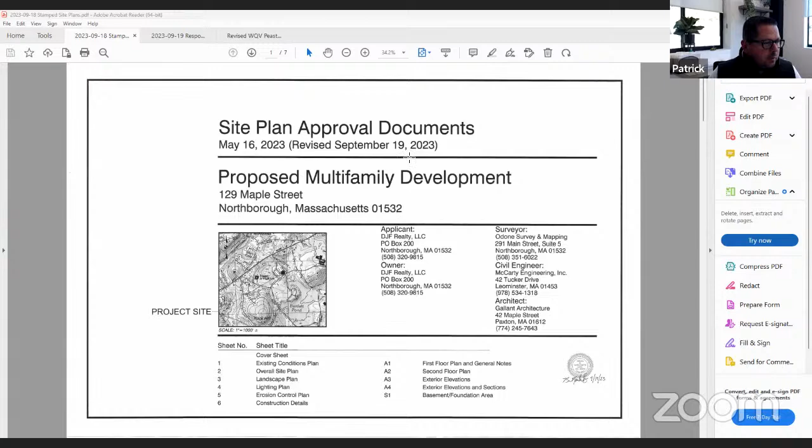So as you can see on the title block here, we started this back in May of this year. The revised plans are dated September 19th, 2023. The existing conditions plan has been updated to show it now as one parcel. If you need any further information on that, Dave can certainly fill you in on the discussions with the town, town council, building, and assessors. But now the site is bounded on Maple Street at the bottom of the page, Johnson Avenue on the left, Omaha Street on the right.

It shows the existing 2.5-story, 5-unit building that will be demolished, as it was destroyed by fire and is sitting there waiting for us to get through the approval so that we can demolish and move forward.

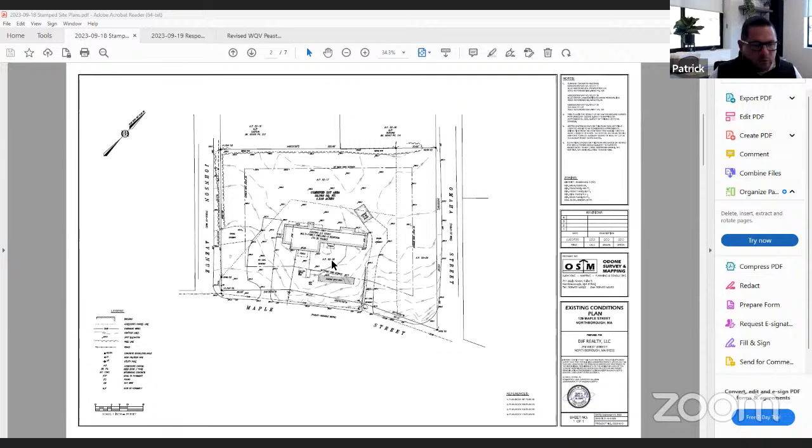The revised layout, Jay, correct me if I'm wrong, but the footprint remained the same for the proposed building. However, we did slide it further back and more centralized on the site. We initially had 2 parking fields. We now have 1 parking field with 1 curb cut off of Maple Street. A walk from the parking lot, we have a screened dumpster pad with a fence enclosure and then a sidewalk that leads to the front door of each of the units.

And then we have a back door off of each of the units that goes to a proposed patio. This represents underground stormwater improvements and underground electric. This is drainage along the front of the building, again going to an underground dry well.

And then your domestic and sprinkler water services coming in from Maple Street. The existing leach field is proposed to remain, with a new 1,500 gallon septic tank being added upstream of that. We also have a proposed bicycle rack here at the corner of the parking lot.

That's our overall site plan. Landscaping plan done by Larry Green, our in-house landscape architect. He's proposing trees here along Maple Street, smaller shrubs at the corner of the parking lot, another large tree, and then foundation plantings all along the building.

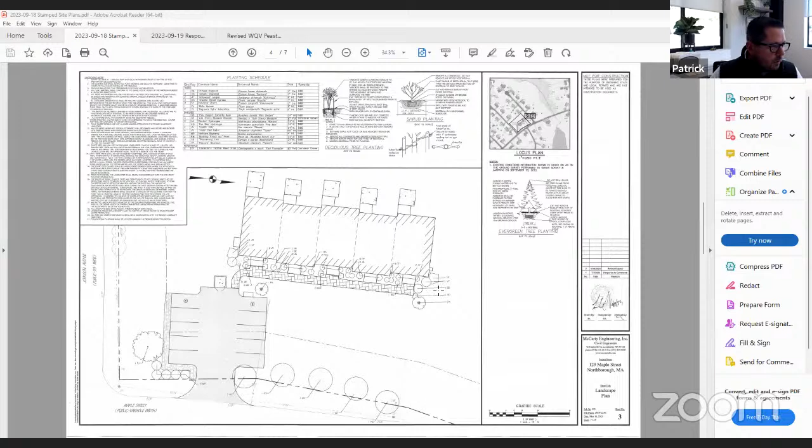If I zoom in, you can see the species he's proposing: single Chinese dogwood, two Satomi dogwoods—forgive me for butchering that, I'm not the landscape architect—some junipers, cypress, cherries, white spruce, and arborvitae for trees.

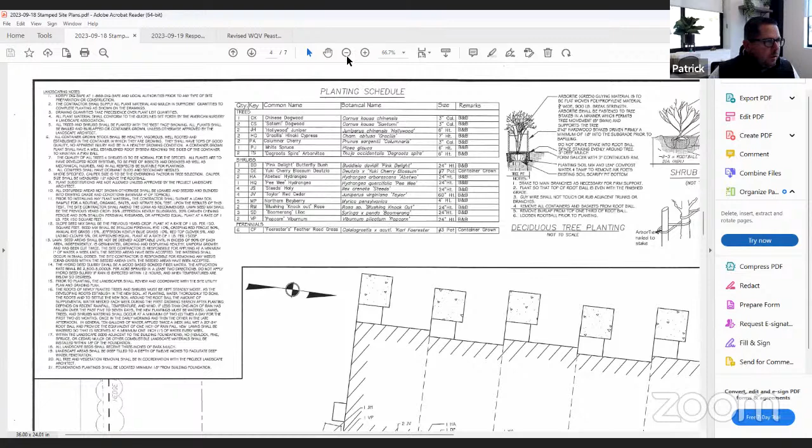So a total of 3, 5, 7, 9, 10, 12 new trees, and then a bunch of shrubs and some perennials, the shrubs being butterfly bushes and hydrangeas, some holly, bayberries, some knockout roses. So Lara, our in-house landscape architect, has put together a plan to beautify both along the street and along the front of the building.

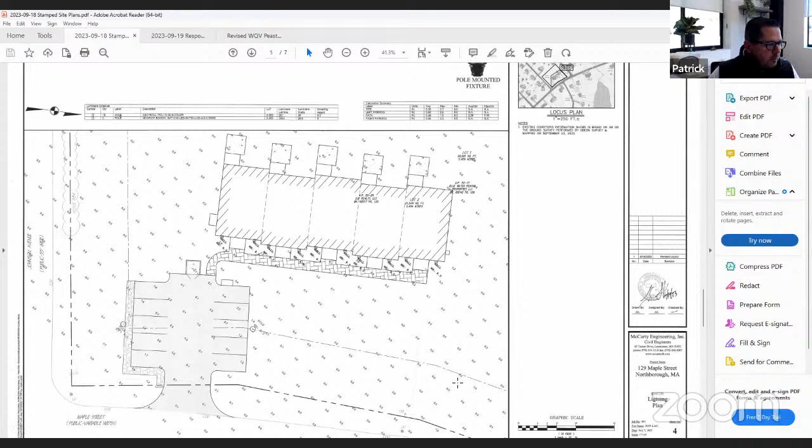Photometric plan—we just have some lighting at the front door of each unit and a couple lights at the parking area. These numbers indicate the foot candles, so you can see at both the street lines and the property lines there are zeros, which shows we don't have any light spillage off of our site onto the surrounding sites. And obviously those would be LED style fixtures.

This is our erosion control and construction staging plan, with some typical construction details of pavement and pea stone diaphragms, water mains, the bike rack—everything, so Dave and his team know how to put the project together.

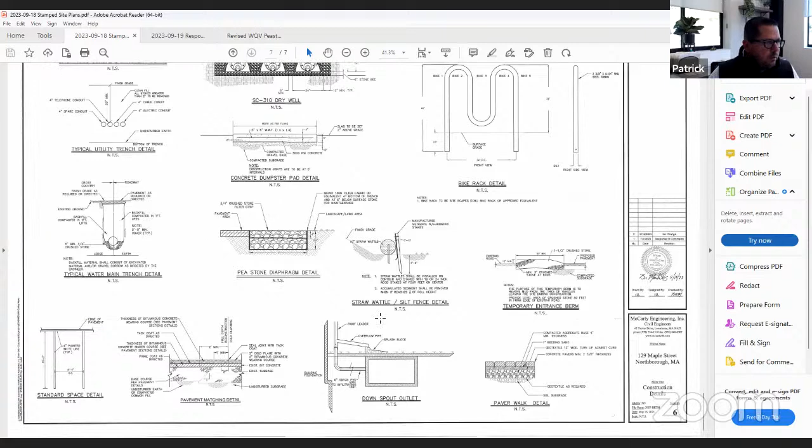So that's really the changes on the site plan perspective. Probably makes sense for me to stop sharing and let Jay share the architectural plans. Unless we want to pause.

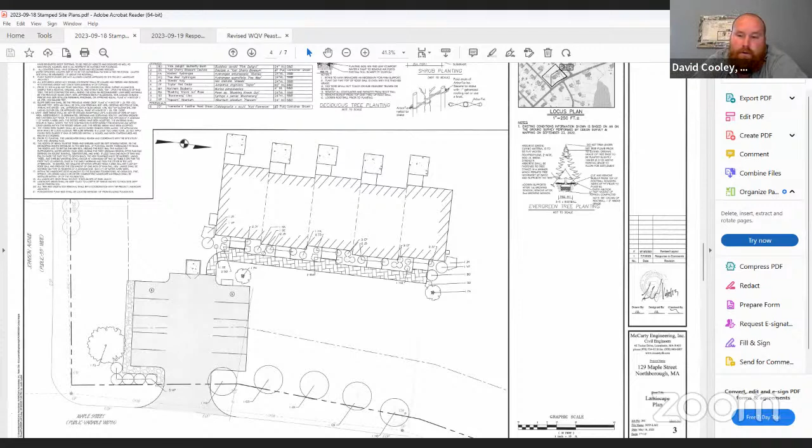Google had a pretty recent one, I can throw it up on the screen if you want. Some of it actually shows the landscaping that's there. Sure, do that, because our bylaw says if you have multifamily adjacent to single-family residential, there's supposed to be 25 feet in between, which you have. It also should be landscaped as a buffer, so.

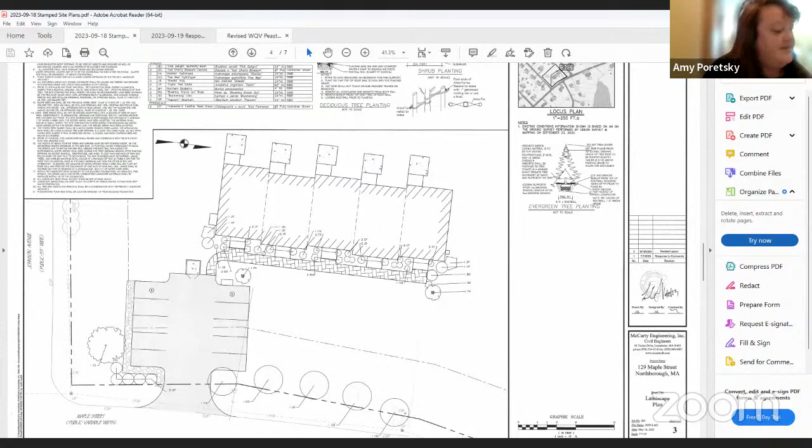I haven't, let's just switch to Google. That's probably the smartest thing to do. Just give me a sec.

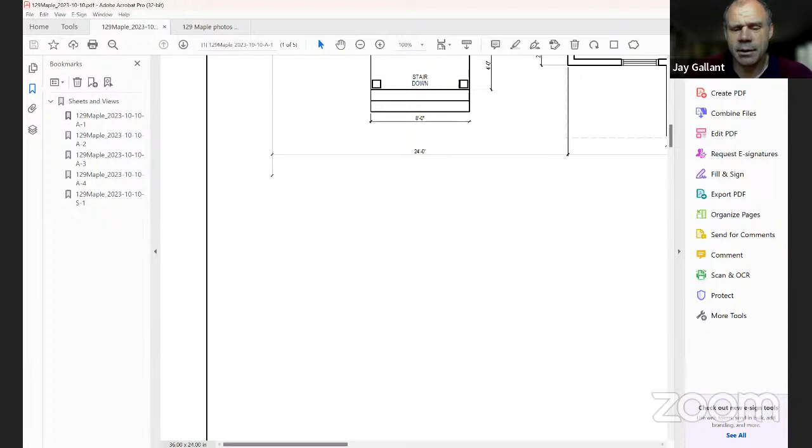So if I could switch quickly to the proposed. Here's a kind of listing, and then I'll switch to the elevation page with a little bit more information, but I put together a summary of the finishes that we're proposing.

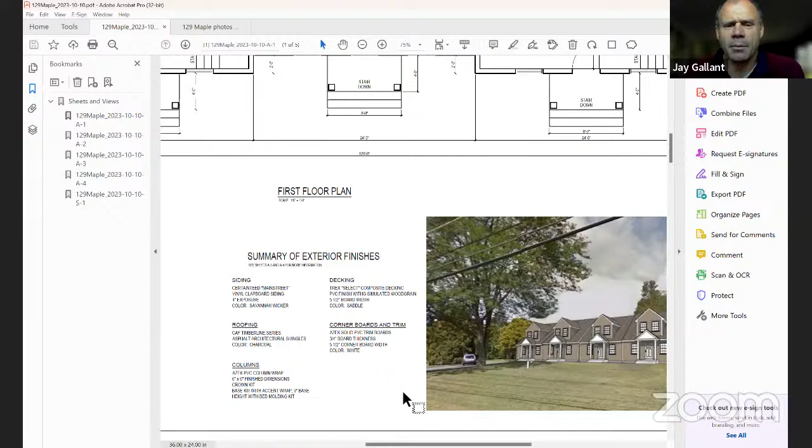The siding is a vinyl clapboard siding, 4-inch exposure, pretty standard, identical to the nearby buildings. Roofing is a standard architectural shingle, dark color, which will be a nice contrast. It'll look really sharp. The decking is composite, I'm thinking a brown to complement the tan, but that's certainly up for discussion.

And white trim and white columns with a little bit of detail just to give it some life. The one nice thing about the original building, obviously it's a shadow of its former self, but it was originally a pretty sharp looking building with some detail. We're trying to bring some of that back. It's going to be a nice building. We want to make it attractive.

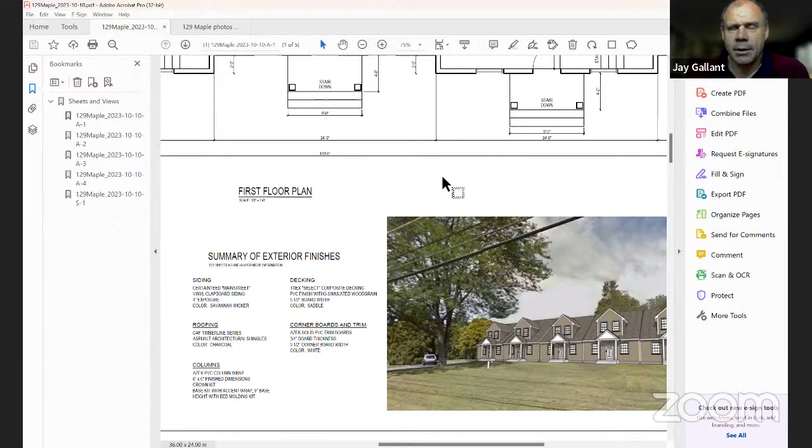On the exterior, the idea, as we talked about last time, is to essentially create 5 similar elements, but it's one building. That's one thing we need to stress with zoning -- it was a single 5-unit building before, and it will be a single 5-unit building again. It'll just have the appearance, since we're going to do 5 individual front doors. It's going to look a little different, but it's the same concept.

So here's the siding. I think the tan is really sharp, along with a little bit of nice detail with the columns.

And then over here is a sprinkler room. We're trying to make that not necessarily disappear, but not be prominent, and hopefully this is a way to do that. We bring the scale down a little bit, and give it a door that's similar and complementary, but not as prominent or interesting.

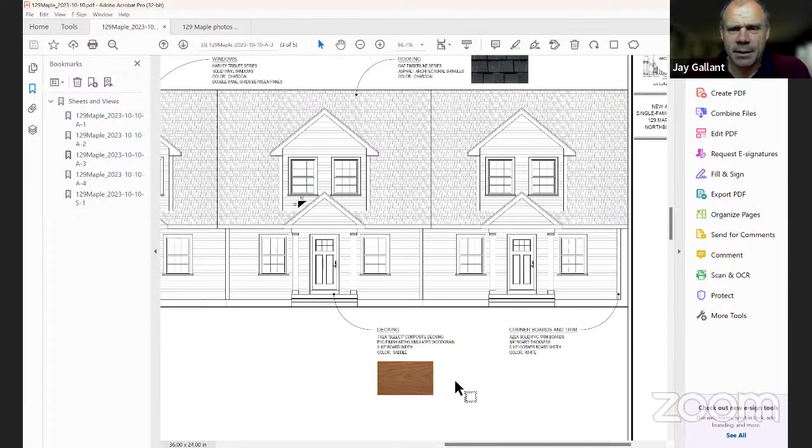We're trying to not make this a maintenance thing. We want to make it fairly simple to live in and maintain. Trex has a really nice product that does that. And then, as I mentioned, the architectural shingles, black or similar color, and white corners and white trim, white gutters and downspouts -- pretty standard materials.

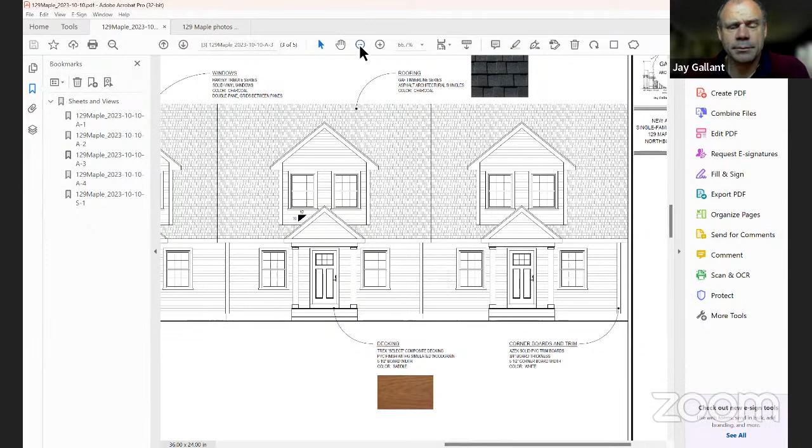So that's the front elevation. The side, as I mentioned -- and I believe in the site plan I noticed this is slightly off center -- we need to coordinate that with the utility installation.

So I don't know, Patrick, what do you think? Is it going to be closer to the street than what's shown here? No, something like that, I think that could slide back and forth as needed. I think what's important to show is that's the side that faces Johnson, so no windows, nothing intrusive going towards the neighbors on that side. Correct, yes, exactly. So if that block slides back and forth to meet the utility design of the inside of the building, I don't see that it has any measurable effect on anybody else.

Sounds good, and it's going to be screened with some landscaping -- that'll help too. We want to make the front of the building, where people are going to be living, the entrance to their homes, attractive and make it pop, but not this thing. So then we go to the next page, which is the other side elevation, similar.

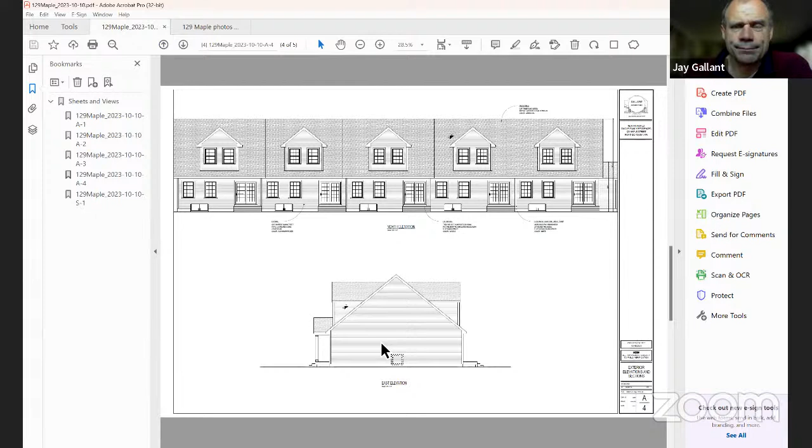We're trying to make it not intrusive to the neighbors on Omaha. And then the back, similar to the front, give it some pizzazz, but not overly so. And the same finishes and the same pattern of windows and doors. Okay, nice and clean and simple.

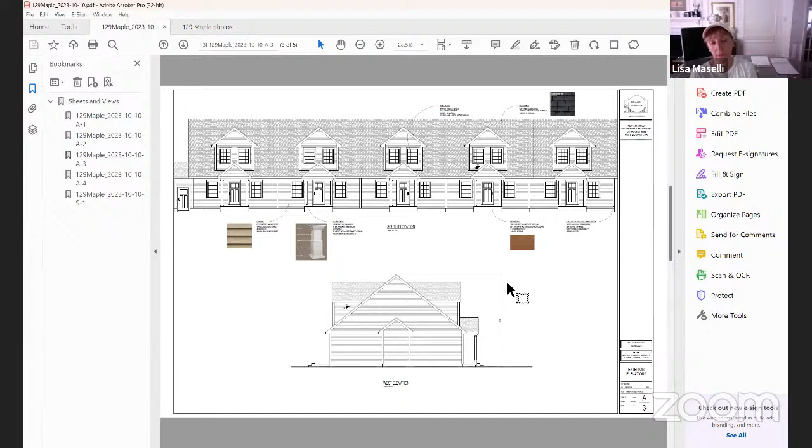Can I interrupt for a second? For both sides of the buildings where you're not letting light in or want to reduce intrusiveness, you could put artificial windows, or even a little arch on the corner high areas, and then a couple of windows as it comes across, just so it looks like a home and not like a trailer. It doesn't have to be functional, it can just be a facade piece. I'm sure that, certainly with antique houses, we did it all the time - there'd be windows that went into the building that balanced, but there wasn't anything on the other side. So when you have both sides just being so blank, driving up and back doesn't look as lovely as it might.

You've really got a lot to work with, and I think that would help enhance that. Moldings are quite important, as you know, and this looks like it - if you're going to start doing some nice molding work, I think that can only help. My other question is, can we change the vinyl to Hardie board?

Because vinyl is a tough material as time goes on, and that makes sense to me. What do you think, Dave? The only thing I'm not crazy about is hardy board - I have it on my house, and it just moves a lot, being a New England product. With the expansion in the summers and winters, we all know it moves. That's my only concern about it.

Although the vinyl, I will agree, doesn't look as great. But longevity, cleaning it, maintaining it, and having a product that's durable to last - I think vinyl goes the longer run and looks cleaner. Hardie plank seems to me like more of a maintenance nightmare. Like I said, I built my house and was all excited to put hardy plank on it, and with the hot days and cold days, it's just been an ongoing issue.

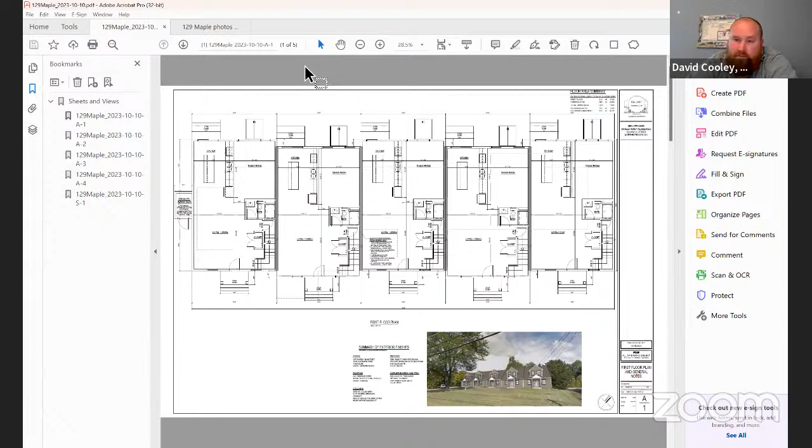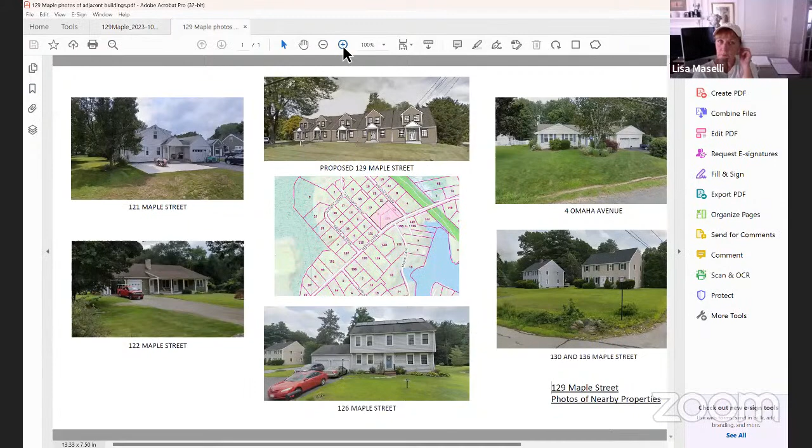The other thing is we're trying to match existing to the neighborhood. Every neighbor to the north, south, east, and west has vinyl, although I think 130 and 136 might have a wooden finish. But like I said, we can take it into consideration - it's not a big deal.

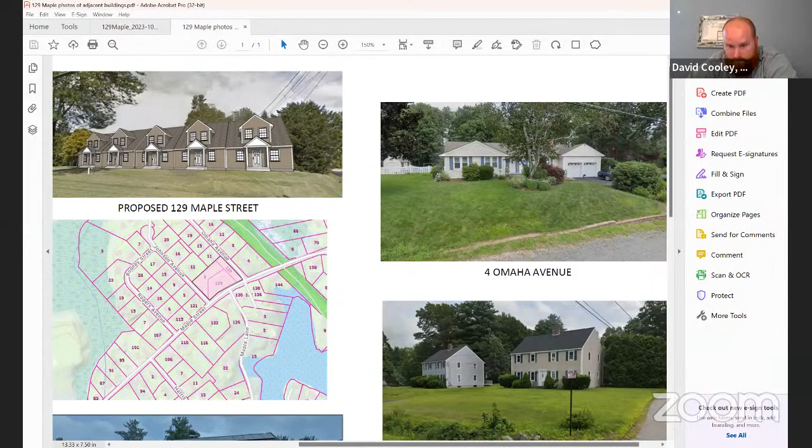Right, and the fact that all these houses were built a lot more in the past - vinyl was prevalent and hardy board wasn't around. You're starting with a new structure, bringing new life to the neighborhood, and you've got a great piece of land - you could really make a good statement that way. Something to think about.

The elements you're talking about on the sidewalls, that's a good suggestion. Could we match the moldings and have panels where windows would be? Is that what you're thinking, or actual windows, screened somehow? I mean, what is there? I think they make moldings you could put on buildings just to make it look that way. I'm sure they do - we could do that.

And even with the new styles, you could take where your gutters are and put a wide piece of molding going front and back, north and south on that building. That would give you a break there, like a frieze board basically. And you could also - I know hardy board comes in more than just the standard pieces.

You know, you've got clapboarding and you've got cedar shingling, that sort of thing. That again gives it a little punch. So there's just so much out there that now you can have fun with, where in the 1980s you had orange carpeting and not so much to work with.

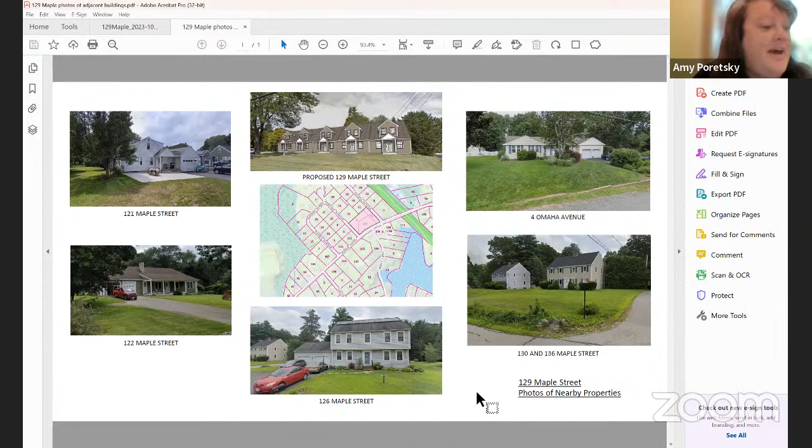Now, did the design show patios out back or no? Want to switch back to the site plan, Patrick? Sure, yes, and I did see there was a comment, I don't know if it was from Lori or not, but I think they just forgot to add back the patios. The front walkway and the back patios will all be made out of the same paver stone. I'm not going to do concrete or stamped concrete, I'm going to do a paver patio.

Okay, that's great. And are there rails? So what is it, 4 steps high in the front doorways? Roughly, we can do it with one landing and two steps, one landing and two steps, two treads. All right, so you don't have to worry about railing and people coming down.

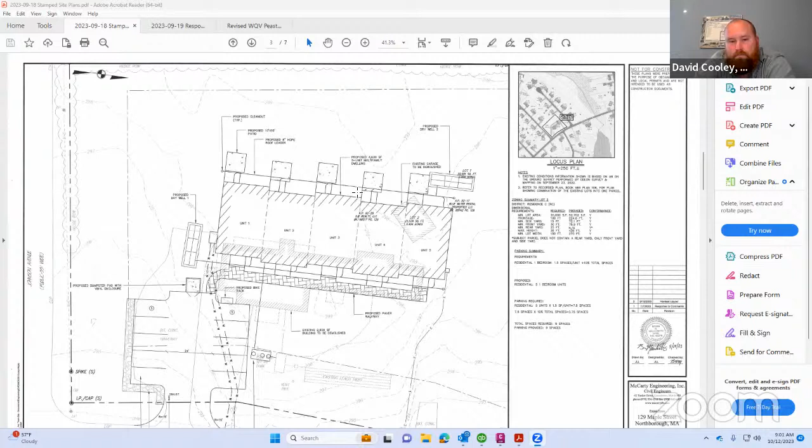And are the pads in relationship - so you've got a slider and you've got a small pad - is that grass that's going to be next to each one of those? Or are you going to have a fence go up, or what's going to give them the privacy when they go to the back patio? No, in between each unit there won't be any privacy. It'll be just open, and you know, want to bring back individuals talking to each other, not hiding from their neighbors. Sometimes that works.

And now I don't see much in the landscaping behind. Is that because it's not on here? So do you have any landscape going behind it? No, there's those large shrubs that the gentleman that lives in both the houses abutting had asked me to leave there. So I talked to him and said, yeah, we can leave them there. I said I can put up a fence, I can do whatever you want. I said, you're the abutter, just tell me what you want to do. And they said that they like the shrubs back there, and I said all right, just leave them. It's not a big deal to me.

I agree with that, screening is wonderful, but I'm talking around the building, because again you're looking at a piece that gets seen from 3 different streets. So as you're coming back, you're making this more of an attractive look. Getting some of that to also come around, because when you have a house, normally you bring your stuff around so that it's just a full piece and not just a front piece. Even on the corners, or coming back to the northeast, northwest areas, it would be nice to put a little something. Normally you see the landscaping, and of course, Dave, with all the little curves and such where you have mulch and things of that nature, just to give it a little bit more.

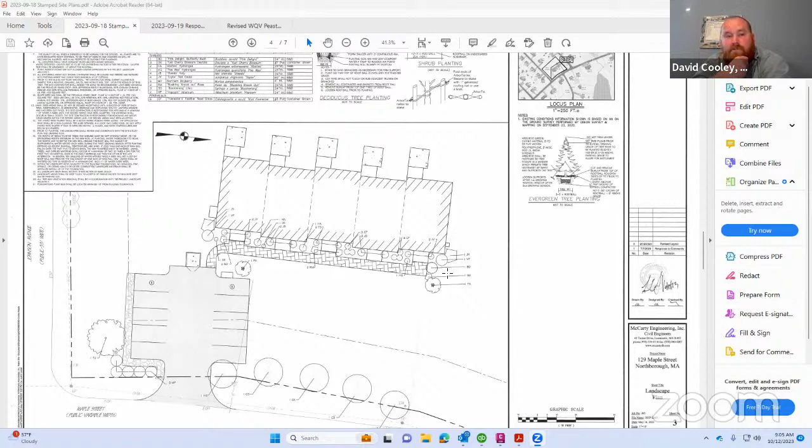So especially I know in my head what I see, but I can't explain it fully. So what are the major concerns? Some shrubs out back, some shrubs and trees, and the hardy plank, and then the sides.

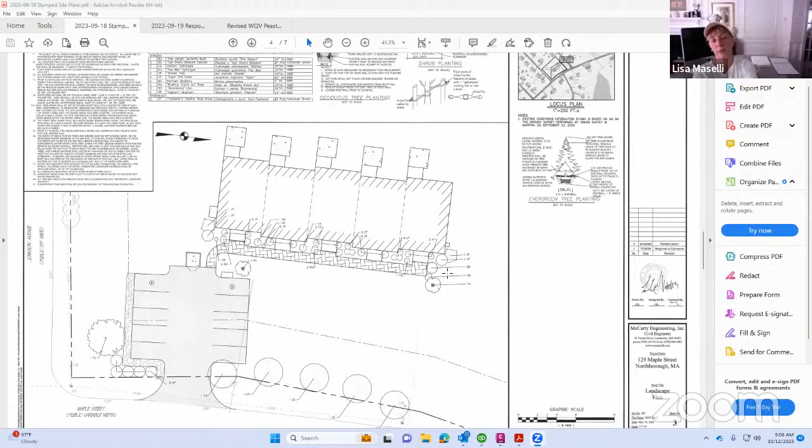We've talked about how you could have a couple of different ways of going with the sides. Maybe judging from the size of the plan, a curved or arched window on top, the frieze board, and then maybe three windows or three fake windows. But you can do whatever you like. The type of door you have, which has lights above, carry that style around the sides so it kind of goes together.

I don't think, Jay, correct me if I'm wrong, I don't think the windows on each side have to be fake. Why wouldn't we do real windows if you want? We just don't want to open up the building to the neighbors necessarily, but yeah, they don't have to be fake.

Okay, and the end units could be different than the middle ones, to get a little bit more for them. Yeah, all right Dave, sure, whatever. I don't care if they're fake.

Yeah, real. So on the right side we have the stairway towards the front. So better would be to have the windows towards the back on the first floor, which will also help with our placement of the sprinkler room, Patrick. So maybe towards the center is ideal, or towards the front where you have it. I just think it'd be nice to buffer it as much as we can. I don't know if you guys agree with that, but it seems like it should not be very visible if possible.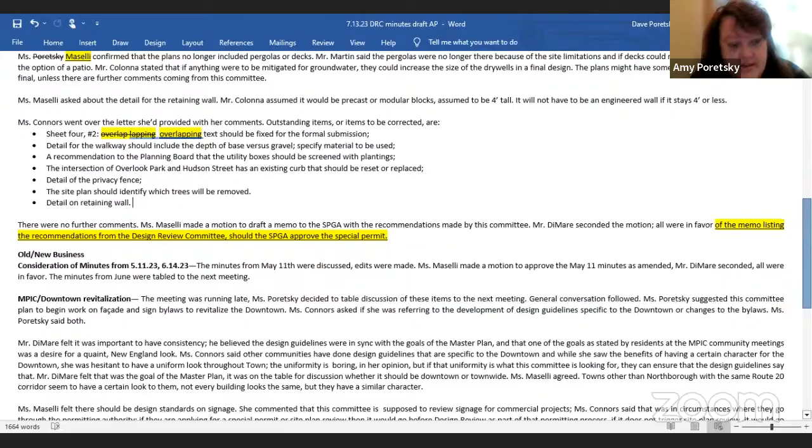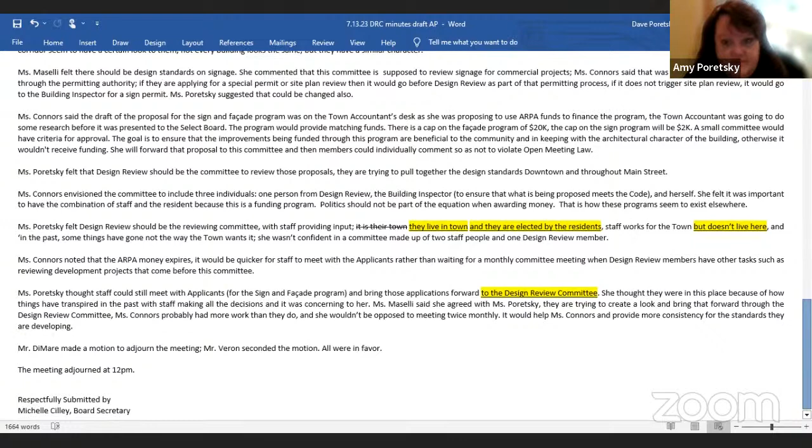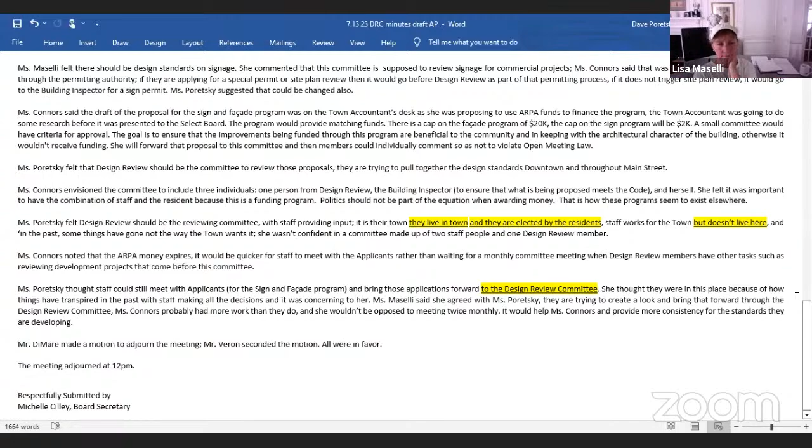And then I just changed some wording, to make it - I wanted to say where we're bringing the applications forward to. Okay, so it's just a couple of small things. I don't know if you had any changes or concerns with my changes.

Looks good. All right with it. Okay, do I have a motion? So moved. Do I have a motion to approve the July 13th Design Review Committee minutes as amended? Second. There you go.

Okay, roll call vote. Lisa Maselli, aye. Dave Varon, aye. And Amy Poretsky's an aye.

And Michelle is working on the August minutes, and then we can do the September minutes - actually, I didn't have time to go through those, so I just wanted to get July done since it's October.

Good idea. All right, so Dave, I don't know when you'll be back, but we're gonna meet really fast with 129 Maple Street next Thursday from 8:30 to 9. That's fine, as long as I have signal, I'm good.

I won't be back for probably - it'll take me about 20-something days to get down there, and then flying back. I'm okay, it should be good. I mean, again, as long as I have signal - we're now back off the coast, so we have signal again. When I go far out, we don't. So it just depends where we're at.

They're really small changes, so if you can't do it, that's fine too. He's just adding a couple windows and a couple trees. Yeah, and from what I remember, there's a walkway in the front - just going on memory here.